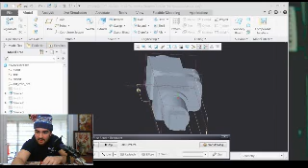So maybe what I'm going to do is I'm going to demonstrate how this works first. So I have my screwdriver here. I can take this apart and show you all the pieces. Actually, no, I'll do that afterwards, after I show you what it actually does. Okay, so

as you can see here, this is supposed to spin, and the issue I was running into is that when this spins, it would hit the edge of the box because the box was not wide enough, and that's an issue, obviously. So what I did was I cut out... well, once I figured out what I was doing, it took me like 20 minutes to cut those holes out.

And I was just sitting there with a saw blade. No handle for the saw, surprisingly. I couldn't find one, so I just picked up one of the saw blades and I started going at it. And so, okay, here we have a rubber band to help hold this in place as I spin it. Hopefully it works. It does work. It works without the rubber bands, but the rubber bands help.

So I have the rubber bands on here because normally there would be a top box that goes over the top, and it would cradle this, just like the bottom box does, and it would keep it in place so that it would not be able to move anywhere. But obviously, there is no top box. So okay, yeah. So you get to see how this works.

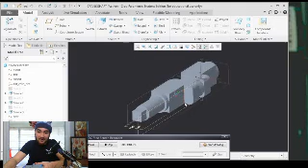Unfortunately, this crankshaft does not have a handle. My dad helped me design, and then he forgot to put the handle on, which is severely unfortunate. But I can still spin it, which is cool. So if we look at the model here, you can see, let me rotate it, that there's this protrusion out on the side. So if you look here, there is no protrusion. It is just the crankshaft itself.

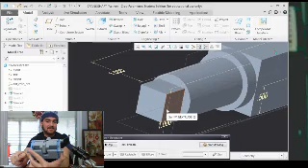And the protrusion was for a handle to go on, and you see the square end at the end here. So it would stick out this way, and then there was a handle that you could just click on that would have the same square, the same cubical shape, and it would just be able to snap on, and then you could turn it like this. But unfortunately, we don't have that.

So check this out. Let me see if I can do it like this. As I spin this, the piston moves up, and as it revolves back down, it moves down. And you see this axis, oh, it slipped off. Well, that's okay. It doesn't really matter. But as you can see, this axis right here stays the same, as this one moves up and pushes the piston up.

Which is interesting because now you have a spinning motion that goes this way, but you have this piston that's able to move up and down. So normally what would happen is, here, let's go to another model. Let's open up top box.

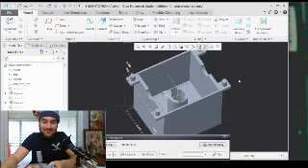What would normally happen is, so this is the top box. This is the piece that we're missing. And you can see here, it would fit just like that over the top of this. And yes, the piston would be in like this position almost. And okay, unfortunately, well, let me show you.

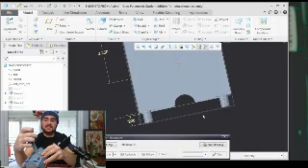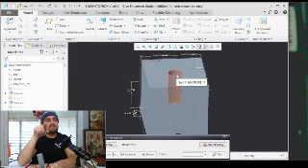So we have this hole in the top, and what is this hole? So basically, this hole holds the piston in place and is kind of a guide for the piston. And so it makes it so that the motion of the piston is straight up and straight down. So normally you can see here there's a pin there, and if you look here, there is a hole there. And we didn't design a pin, and normally there would be a pin there.

So if we go like this, I mean, the screwdriver works, but it's a little bit ghetto. It doesn't really work. If you look at it now, the piston head here, this is called the piston head. The piston head can now move like this, moves back and forth. And why do we need that?

So what's happening here, we'll move this to top dead center. That's what it's called when it's fully extended. Almost there. Okay, perfect. So this is called top dead center, sorry. So you can imagine if this piston head is fixated in place, and it's only allowed to move straight down and straight up, right?

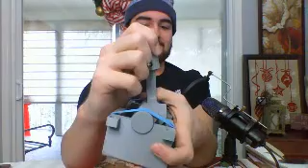Then what would happen is this piston arm would need to be able to move outwards like this. So it's really hard to move. If you can see that, you can see the piston arm moves like this. It moves like this. And that's because instead of the piston head moving, the piston rod will move instead. And that makes it so that it can go straight up, straight down.

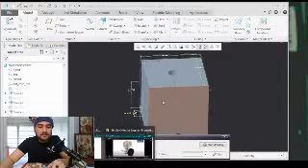Okay, so sorry that I can't really show that with my current creation, but you can understand the basic concept. So I found this video, hold on, and you can understand a little bit better with this video. So here, let me back it up. This is basically the same concept as a single cylinder engine. And so, okay, let's play the video.

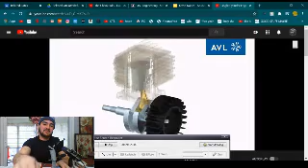You see here, we have our piston head moving up and down. It's stationary, and you can see the yellow there. The yellow part there is the piston arm, which is this right here. And you can see it moving back and forth. And so one of the issues with this is that I redesigned it, but there's not enough plastic, obviously.

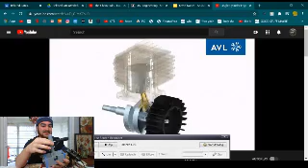But here, we'll take this off. As it goes down it moves to the side, right? It goes like that, and it's at an angle, right? Let's pause that video. At an angle. And so this needs to go straight up, but unfortunately, there's not enough room inside here. You can see I tried carving it out. There's not enough room inside here to allow for that arm to go at that angle.

So I would need to cut out. Excuse me. I don't have COVID, I swear. I just need to drink some water.

I just need to cut a notch out of here so that the piston arm can move freely, right? Because when it's at this angle, the holes don't line up, and that's an issue. So I redesigned it though, and I'm going to reprint the whole thing next week, and maybe I could submit a video to Miss Kelly, and maybe if she was so inclined, she could show the rest of the class, like next semester or something. But yeah, so that's this. So okay, let's take it apart.

Here we have piston box, right? A little bit too small. That was the issue. I redesigned it. I redesigned everything actually. So once I go to reprint it, it will be perfect. So let's look at our other models here.

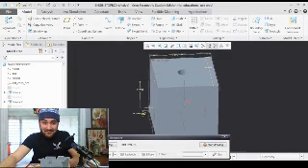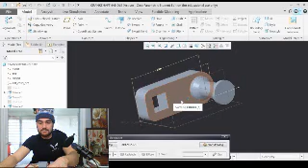We saw the top box. All right. Let's see. We saw the crankshaft. Crankshaft handle. Okay, this is cool. So, crankshaft handle. You can see here the square end I was talking about. This crankshaft handle would fit on that end, which is very, very cool. So it would fit on the end, and you can imagine you would hold that handle like this, and you would be able to twist it. Right? Pretty simple.

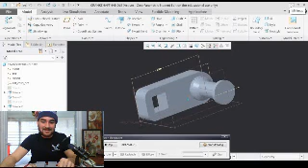And there's lots of cool things on this program that AutoCAD either doesn't have or has hidden. And I don't know everything about AutoCAD or this, but I feel like this one was more intuitive. I liked this program a lot better because it's made more for 3D objects.

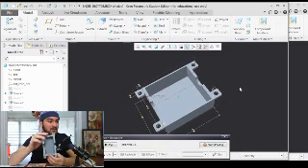Let's see here. Okay, bottom box. So you can see this box. This box is much thinner than the thickness of this one, and it's also wider, which is very important.

Oh my gosh, someone is calling me.

You can see here we have these dimples, and these dimples are so the top box would have the opposite, and it would click into place, and then we could drill a screw through it. That was kind of my dad's idea, but I changed it. Instead, here you can see the holes, and the top box has protrusions that will just click into place. And I mean, we could glue that, or we could just leave it as is so that you can dismantle it.

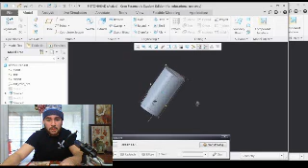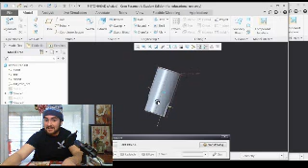All right. We'll open up the piston head. So this is my piston head redesign. You can see the notches cut out so that, let's see. Imagine this, right? Piston arm right here, and it would need to move back and forth. And so we have those notches cut out to allow for maximum movement, so that even if the piston arm had to go out at an angle like this right here, it could. And that's completely unnecessary, but I just wanted to make sure that when we print it out, we wouldn't have to do any extra editing.

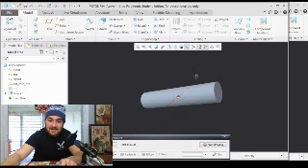Let's see. Piston head, piston pin. I designed a pin. Pretty simple, just a cylinder. It has the exact dimensions. Oh, it would be cool to show you. So the dimensions are hidden in there. If you want to see them, you say show dimensions, click on the object, and then we can go ahead and show both of these. Boom. Now we have our dimensions here. Hold on, let me full screen this.

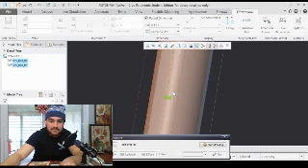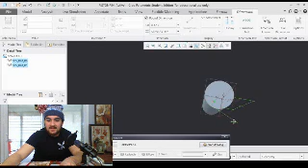0.66, or is that right? Oh, 0.99. Sorry, this is upside down. There we go. 0.99, and we can drag this out here so that we can actually see the dimension there. And then the circumference, I don't know why it's like that. We could change that technically. It's 0.22, which I determined was optimal for the hole. So yeah, and then we click off and it's done. And then I have to save this now. Okay, we're good.

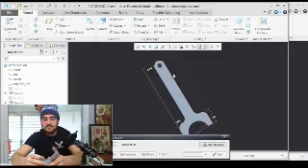We'll go ahead and open up Piston Rod. Okay, Piston Rod. So here we are. Let me take this apart now. Where's my, okay, here it is. Let me take this apart and show you exactly how we did this. So this is how they do it in a real engine.

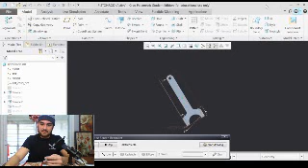In a real engine, the piston rod does have two parts because the crankshaft is what's delivering all the power. In this creation, it is also what's delivering all the power. So we want it to be one solid unit so that it's not weakened in any way, because there's so much force going through this at once. It would be hard to have it in more than one part, unless you had bolts or whatever. But so here we have this half of our piston rod, and you can see in the drawing here, this is the same thing, right?

We have all our dimensions. This half, see, half of it fits over the crankshaft here. Click. Fits pretty good. Does a little squeaking. That's okay. I should have probably put some type of lubricant or something, but whatever.

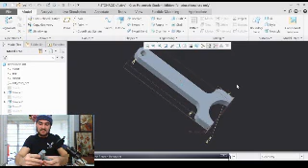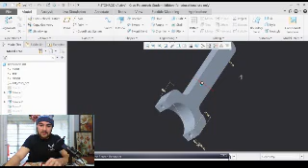It works. Okay, so there's one half, and you can see here we have these dimples in it, and then a smaller hole, and that's the pilot hole. So, let me explain that. We'll open up another, and this is the piston cap. So you would imagine looking at this, this isn't going to stay on here by itself, obviously. So we need to have the second half. And of course, we can't have this be one solid object, or else how are you going to get it on here? So we divide it into two.

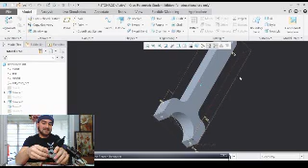So we have the cap. And this is what the current design cap looks like. And in the updated one, I changed it. Oh yeah, I also made these edges here curved to fit better. Also looks cooler, not gonna lie. So here we go. Let me move that out of the way. Okay, check this out. As you can see, this cap, pretty boring, pretty normal. Just has the holes, holes on one end, holes on the other, and it fits over the half of the shaft.

So what's important is that these holes are big enough so that the screw can just fall right through. And the reason why that's important is so that when this screws into place, it doesn't push it out. Because as you're screwing this into place, it's really hard. And what it does is, instead of screwing in, it just screws through the threads on this side and then pushes this out and doesn't screw in. So you need to have this loose.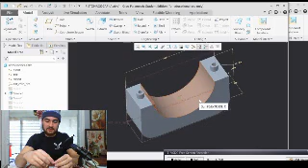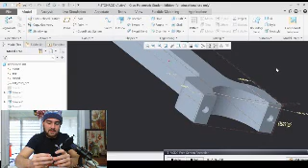But in the updated design, I resolved an issue that I will explain in a second. You can see these little nubs on here, and they fit into place on the other one. Let's take a look. They fit into place in these holes. If I screw this back into place, let me do that really quick. Gosh, okay, sorry. I'm blind. Okay, so I've screwed it back into place.

You can kind of see that these aren't exactly lining up. And the issue that these little pieces basically resolve is that it lines it up for you so that you're not sitting there trying to screw it in by looking at it with your eye. So it just kind of lines it up for you. All right. I don't think there are any more models. So let's put it back together for a final demonstration.

I need my water. Okay. Before I die, all right.

Check it out. Up, down, up, down. It's pretty cool. Once I reprint this and I have the handle, it's gonna be really cool. An issue with this also was that you can see here, there's a lot of play. This moves back and forth and it doesn't really fit perfectly, which is why I had to make these holes in the side so big. The width of this isn't very wide, but I knew that as I spun it, it would move side to side, and if I didn't do that, then it wouldn't line up. So yeah.